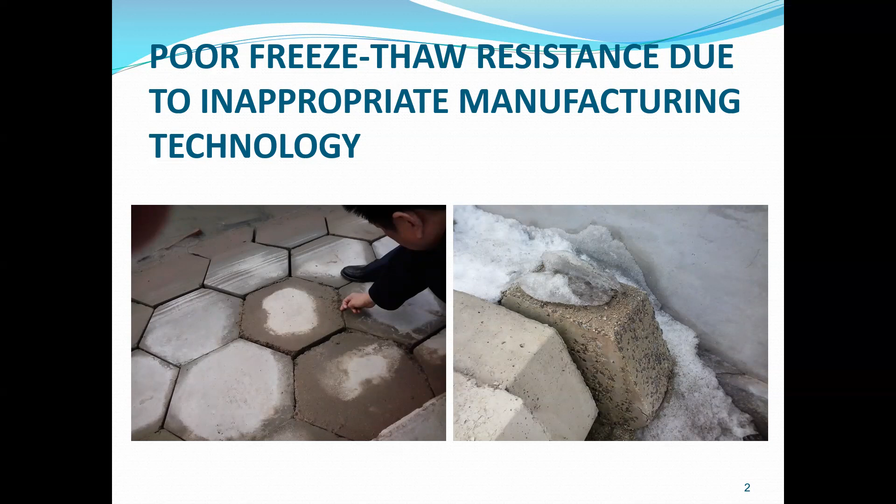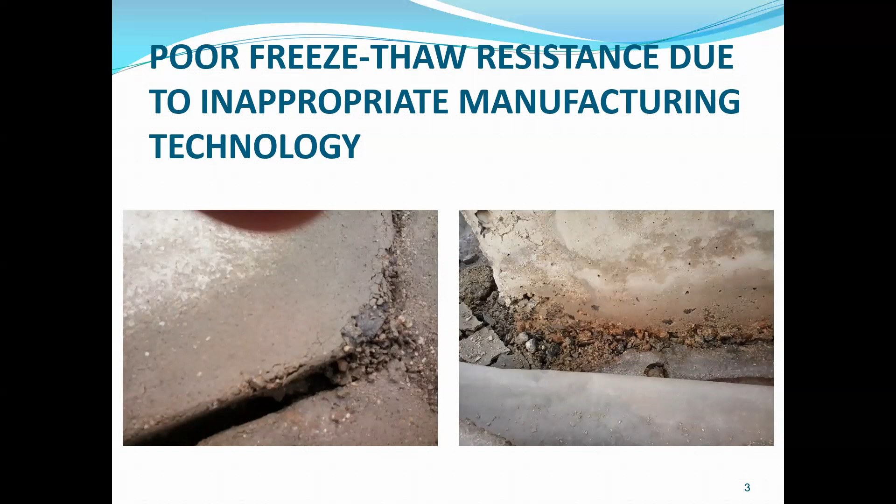To ensure the durability of constructions is one more current world tendency of sustainable development of mankind. The most important properties of concrete for a specified case are used for evaluation of durability dependent on destination and environment. Resistance of concrete to freeze-thaw cycles is one of the criteria. The cements obtained due to alkali activation of blast furnace cements, the alkali-activated blast furnace cements, are the most prospective ones to ensure advanced service life of concrete structures of special purpose.

The peculiarities of porous structure cause advanced freeze-thaw resistance of alkali-activated blast furnace cement concrete. Porous structure of such concrete in its turn is caused by technological factors such as consistency of fresh concrete, aggregate state of alkaline component, curing condition, and application of chemical admixtures. The modern requirements to consistency of fresh concretes are governed by practice. Production of alkali-activated blast furnace cements, namely under all-in-one technology, causes the expediency of alkaline component exactly in dry form.

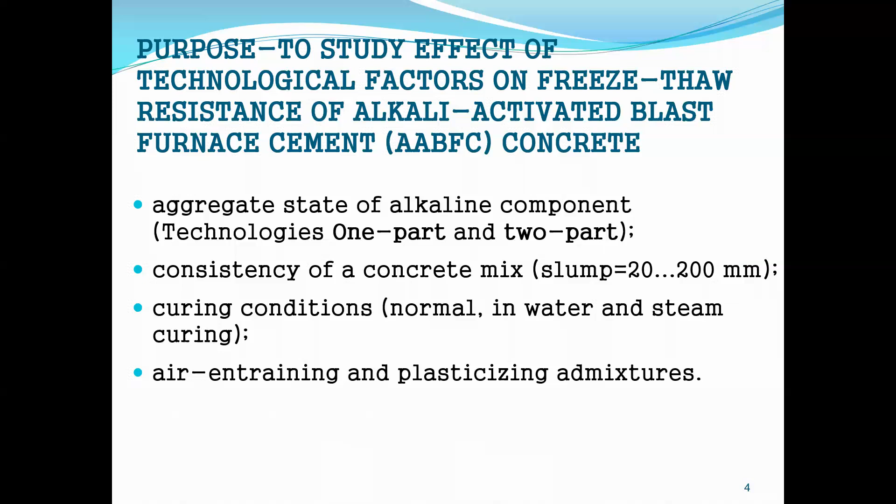Thus, the aim of this research was to investigate the effects of technological factors on porous structure of alkali-activated blast furnace cement concrete of special purpose to provide its high freeze-thaw resistance as criterion of sustainable performance. The main constituents of the blast furnace cement type CEM III/C were presented by granulated blast furnace slag and Portland cement type CEM I 42.5R. The blast furnace cement was composed of 95% of slag and 5% of Portland cement by mass.

The alkaline component was introduced in a concrete mixer in dry form or in liquid form in such a way that its content in the concrete would be equivalent. A river silica sand and a granite gravel were used as aggregates. Alkali-activated blast furnace cement concrete was modified by complex admixtures. Complex admixture was presented by sodium lignosulfonate and waterproofing agent based on ethyl hydrosiloxane polymer.

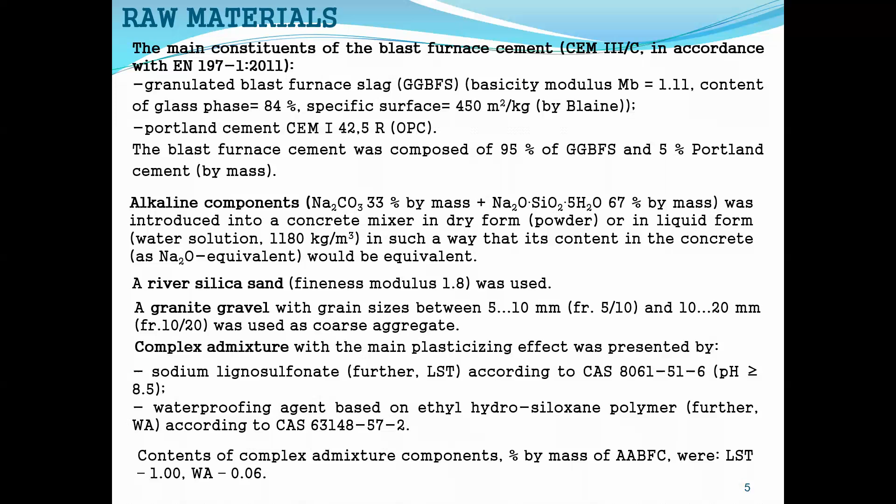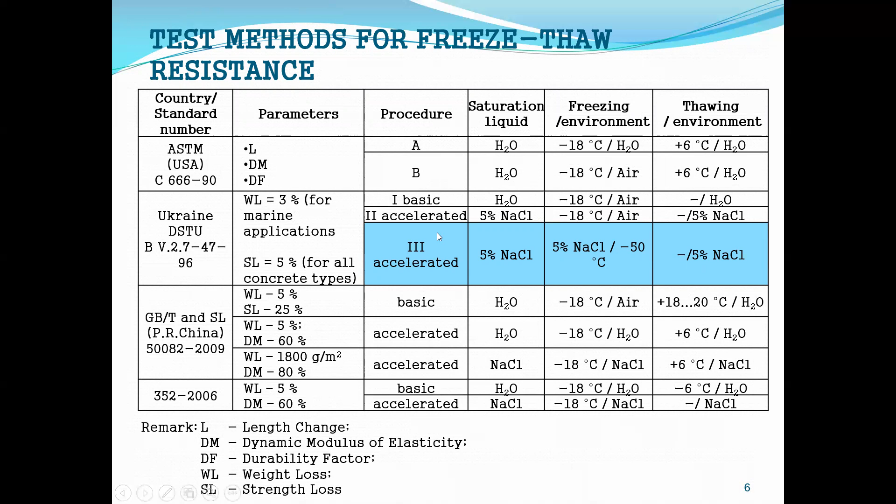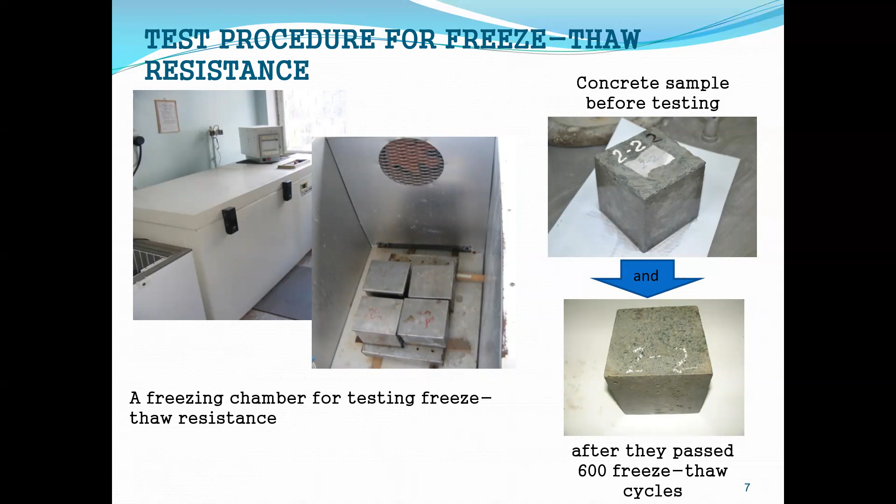Freeze-thaw resistance of alkali-activated blast furnace cement concrete was studied according to the third accelerated test method prescribed by the national standard of Ukraine. According to this accelerated method, the concrete cubes were saturated with a 5% solution of sodium chloride at temperature 18 degrees, and after that were subjected to freezing at temperature minus 50 degrees. Thawing was done in a 5% solution of sodium chloride.

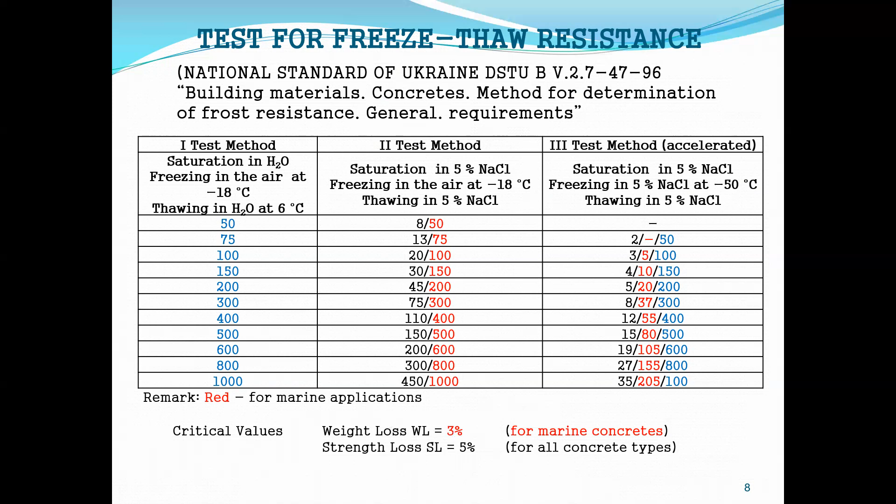A class of concrete in freeze-thaw resistance was designated as a number of alternate freezing and thawing cycles at which the mean compressive strength decreased by no more than 5%. The freeze-thaw resistance of concrete was assessed by the correspondence between permissible number of freezing-thawing cycles by the mentioned method and by the first basic method prescribed in the mentioned standard.

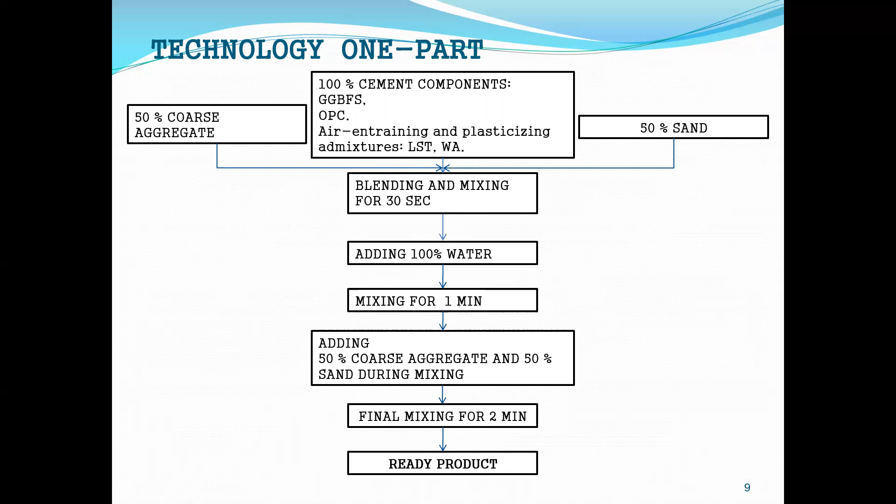Alkali-activated blast furnace cement concrete was prepared by one-part technology, when alkaline component was introduced in a concrete mixer in dry form, and two-part technology, when alkaline component was introduced in liquid form. The specimens hardened in water, under normal conditions and under steam curing.

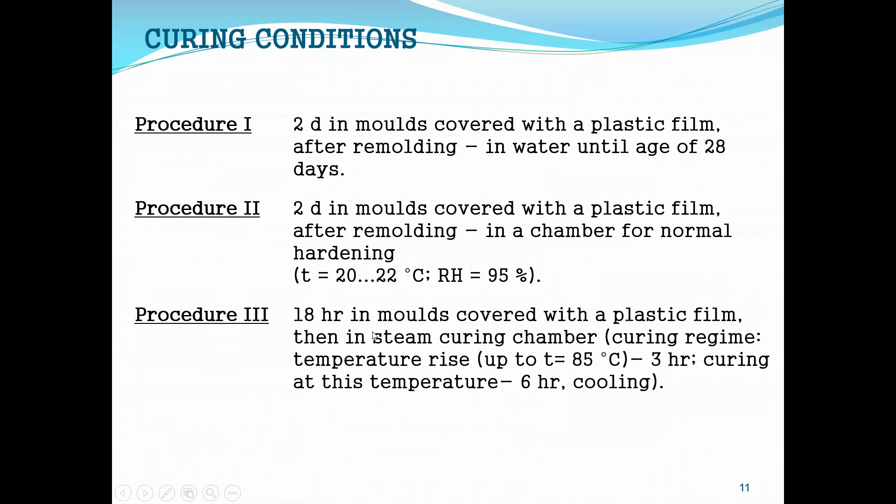It was revealed that consistency of fresh concrete is an important factor of porous structure. Thus, increasing of consistency from class S1 up to class S4, with application of alkaline component in dry form as well as in liquid form, ensured increasing volume of open pores and decreasing volume of conditionally closed pores. Less volume of conditionally closed pores determines formation of less dense and more permeable structure, which causes deterioration of physical and mechanical properties of alkali-activated blast furnace cement concrete, including freeze-thaw resistance decrease.

Application of alkaline component in dry form, in contrast to liquid form, ensured high volume of open capillary pores at consistency classes S1 and S4 accordingly; lack in filling intensity of porous space by hydrosilicate gel caused this phenomenon. Decrease in volume of conditionally closed pores occurred. Specified changes in porous structure ensured a decreasing tendency in freeze-thaw resistance.

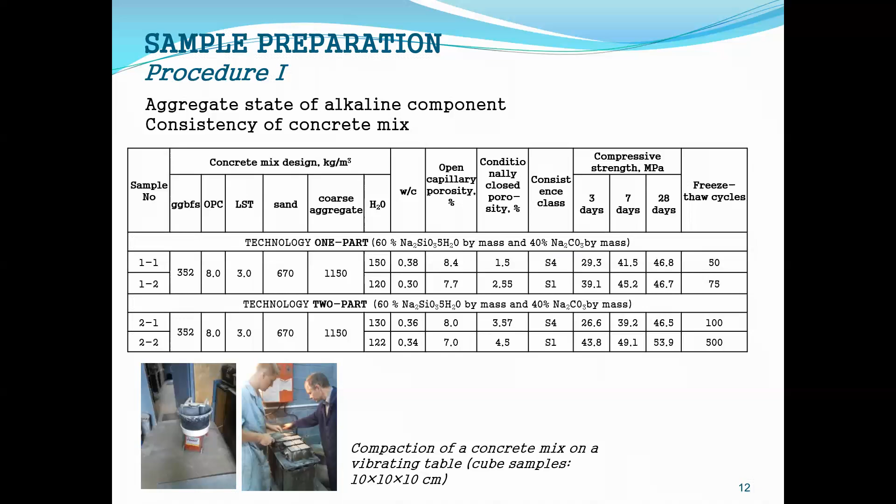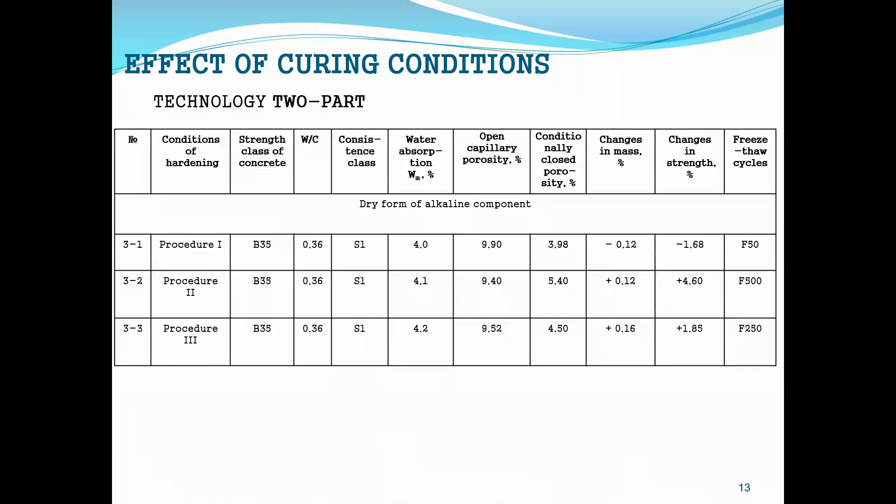Normal curing conditions of alkali-activated blast furnace cement concrete were more advisable if compared with curing in water or steam curing in view of formation of effective porous structure. Porous structure of alkali-activated blast furnace cement concrete at consistency of class S1 after hardening during 28 days under normal conditions was characterized by decreased volume of open capillary pores as well as by increased volume of conditionally closed pores compared with analogs under water or steam curing. Specified changes in porous structure contributed to formation of concrete with more dense structure. This phenomenon provided advanced freeze-thaw resistance in contrast to analogs.

Application of air entraining and plasticizing admixtures ensures higher volume of conditionally closed pores and lesser volume of open capillary pores, which increases freeze-thaw resistance when alkaline component was applied in dry as well as in liquid form.

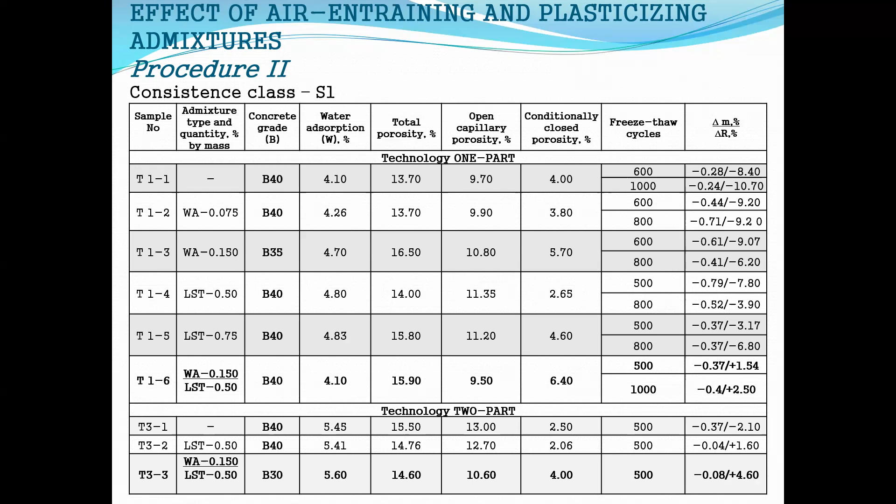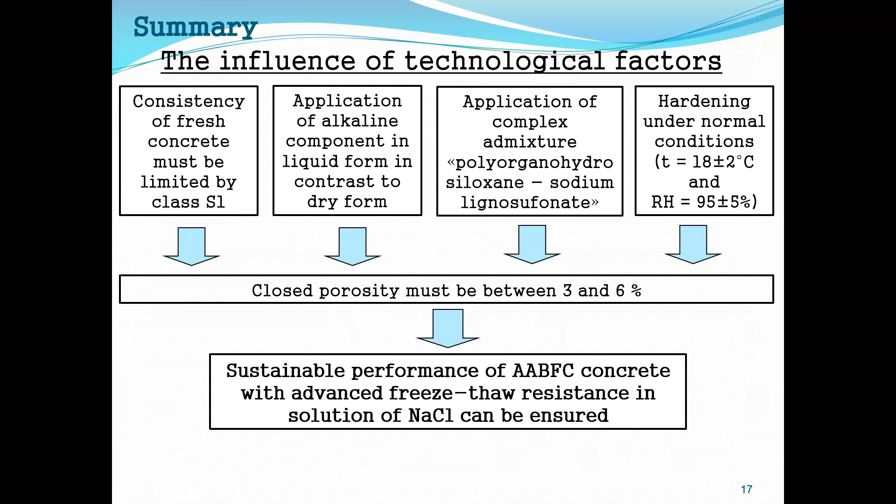The ways to ensure high freeze-thaw resistance of concrete of special purpose were pointed out: limitation of consistency of fresh concrete, application of alkaline component in liquid form in contrast to dry form, application of air entraining and plasticizing admixtures, and hardening under appropriate temperature-humidity conditions ensure closed porosity between 3 and 6% and advanced freeze-thaw resistance.